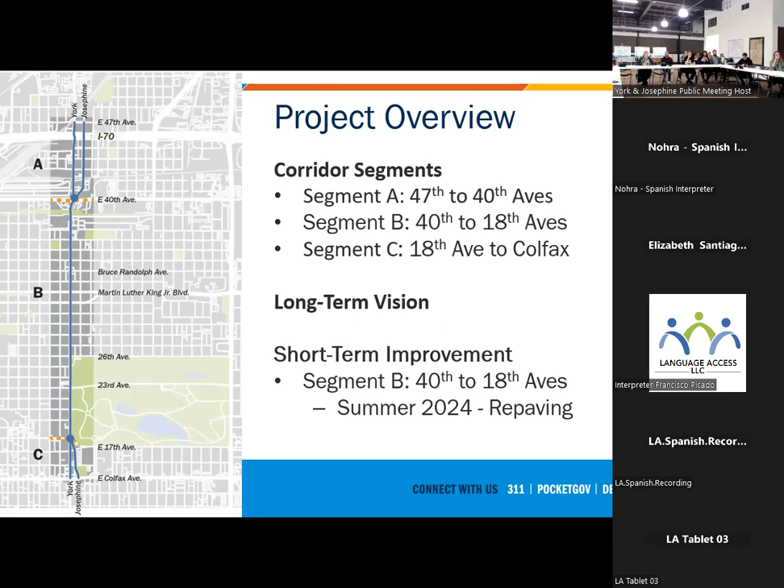So just a high-level schedule, where we're at, where we're going. For those that weren't part of our last public meeting, that occurred back in July. We did do a lot of community touch points between then and now as well - went to a bunch of farmers markets, met you all kind of on the street, a lot of different flyering events as well, where we got to speak with a decent amount of you. So thank you all who were there the first time around and who came because of the new flyering that we just did recently.

Since that last meeting, we did our alternative analysis internally, and I'll talk through what that really means and how we got to those alternatives. Going forward, we will have a third public meeting later on, probably end of Q1, Q2 2024, to follow up on the final design here.

So I've said alternative analysis a lot. What that really means is taking a bunch of different information for a corridor and identifying what the best alternatives are. We're analyzing the alternatives we can do on this corridor from what's currently existing on the roadway today. What goes into that is previous planning efforts, existing conditions, the city's goals and objectives, as well as your input from the last few community touch points and public meetings. What we do from there is develop alternatives, 3 specifically that Eileen's going to go through in a couple minutes. We'll use this meeting to help identify which one we should move forward with as the long-term solution to making York and Josephine corridor safer.

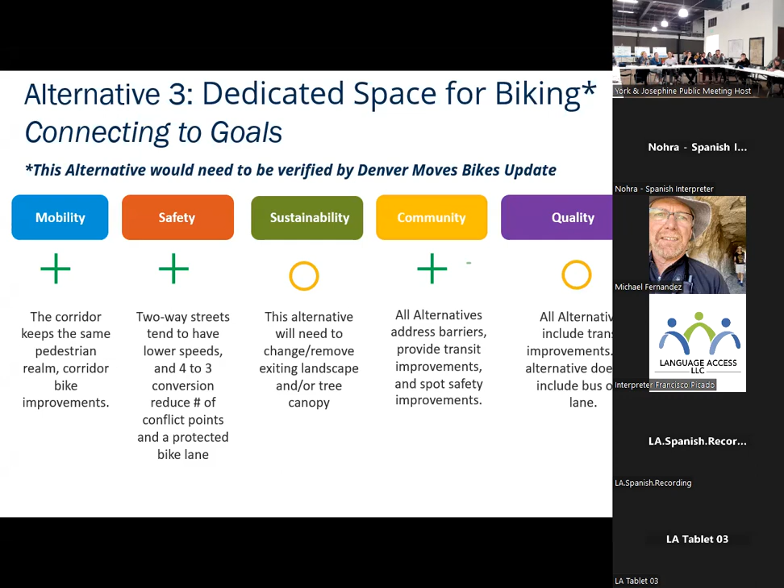So the segment details. Considering how big this corridor is, we're going to look at the north section of both York and Josephine and go through each alternative so we can have a collective understanding of what could happen there.

Oh, yeah, yeah. Pause for questions.

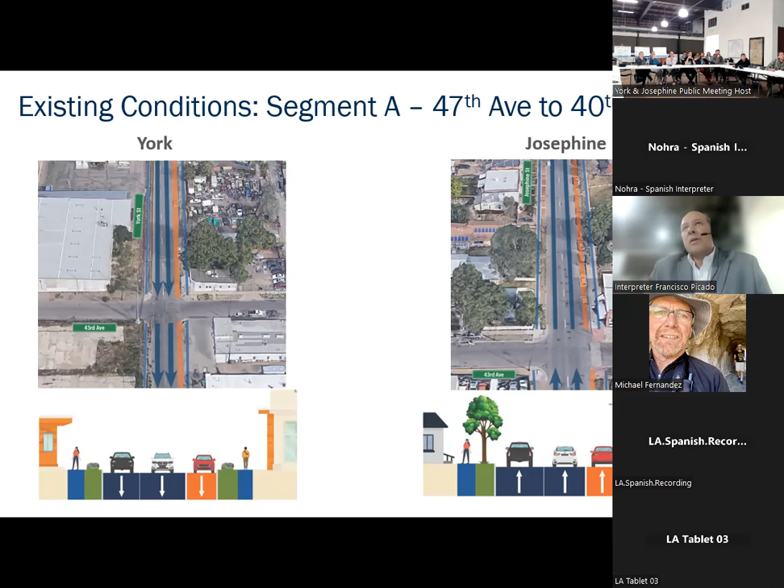All right, so we're going to head into segment A. This is just a snapshot to ground us and remind us what part of this corridor we're talking about. This is segment A, York and Josephine. Currently, they each are one-way in each direction—York is southbound, Josephine is northbound. And we can kind of start hopping in.

So alternative one is considering reconfiguring the corridor. Related to what Mike mentioned about how we develop these alternatives, a previous recommendation from another planning study said, let's convert these to two-way streets, as well as lots of public input related to this saying, let's convert them, let's stop the one-way.

The idea then is that York would use one lane in each direction with a center turn lane. Josephine would be one lane in each direction with safety and/or parking on street. Right now, again, they have parking on street on the east side—this would offer parking on both sides, really looking to downgrade it if it makes sense, since right now it's carrying a bunch of freight, a bunch of trucks.

We want them actually to stay on York. That's the idea with this - all of the freight movements and commercial vehicles associated with the industrial area will stay on York. The next slide will cover this.

Josephine can turn into that neighborhood place, very similar to the collector, the neighborhood collector. Columbine is just the next street on the east side of it. So really trying to change the character of that and make it more into a neighborhood street. If you go to the next slide.

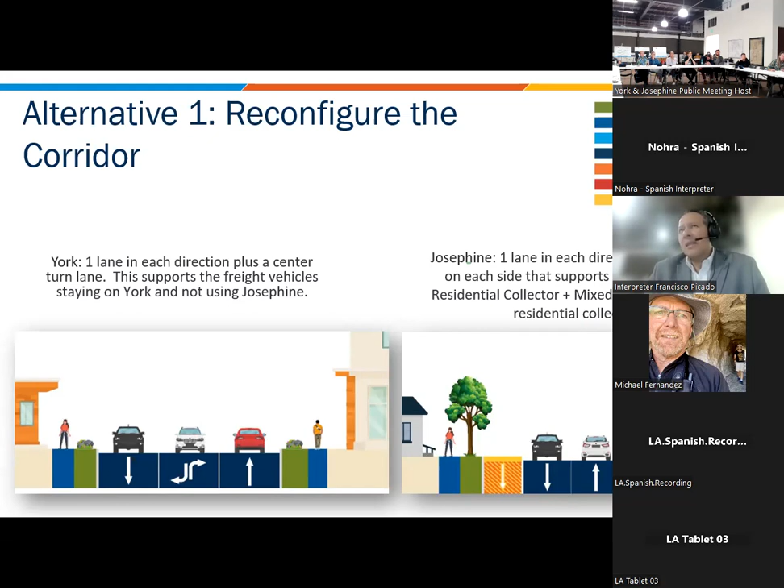This came up - we met with our stakeholders on the corridor as well, and they asked how would this happen, how would the turning movements and vehicles move, how would this work? So this is an idea of how the transition can happen.

So again, we're really looking to have vehicle movements from that through traffic, whether coming from south or north - we'll say from 40th - stay on York. If they need to go to Josephine, that's the whole point of this. They're going to make a hard right turn and a hard left to head north or south. That's the way the neighborhood works.

So the idea again is all of the freight movements and main traffic looking to get to or from I-70, or to continue going north, there's no reason to go onto Josephine. They're just going to stay on York Street. That's really going to continue to be that arterial collector, providing more of that prioritized space for those movements.

There's a couple green arrows we have here, acknowledging that we need to keep people walking and biking connected. So let's use the previous street or create new spaces, and reprioritize what Denver owns to make that a priority for people walking and biking so that connectivity continues.

Next slide - Alternative 2 is prioritizing transit. This would keep the one-way streets, and we would align with the transit pickup and drop-offs related to the doors on the bus. So we need to keep them on one side of the street for each direction.

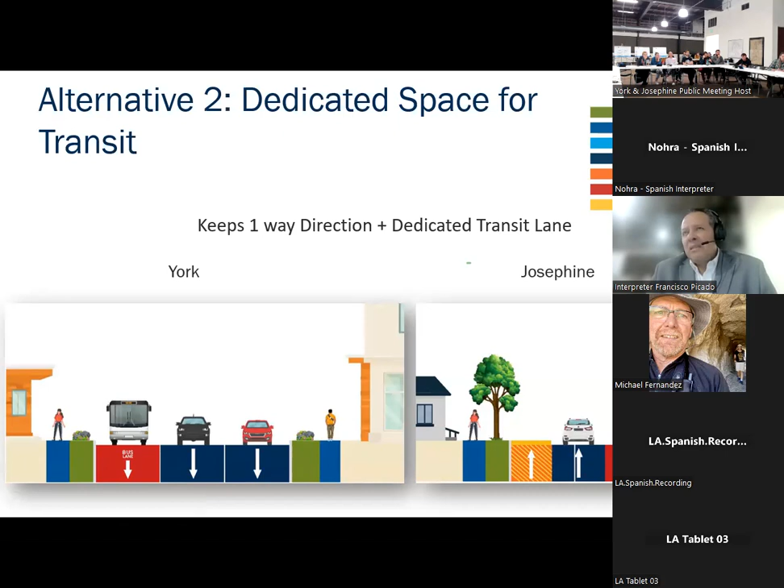You can go to the next slide - and for dedicated space for biking, for people biking.

For this alternative, we would reconfigure the corridor, making this into two-way streets. Then we would prioritize and move people that are biking to a neighborhood bikeway on the neighborhood street, Josephine. That would be the goal - where people would bike is on Josephine. Alright, next slide.

So this is the time - the next 10, 15 minutes are going to go through each area of the corridor study, go through the alternatives, and then take time together, both online and in person, to clarify and ask questions about these alternatives.

Yeah, just want to double down on what Eileen said there - this time open for questions is really to get clarification on each alternative. And then when you have a preference, that would go into the survey or on the hard document here in person.

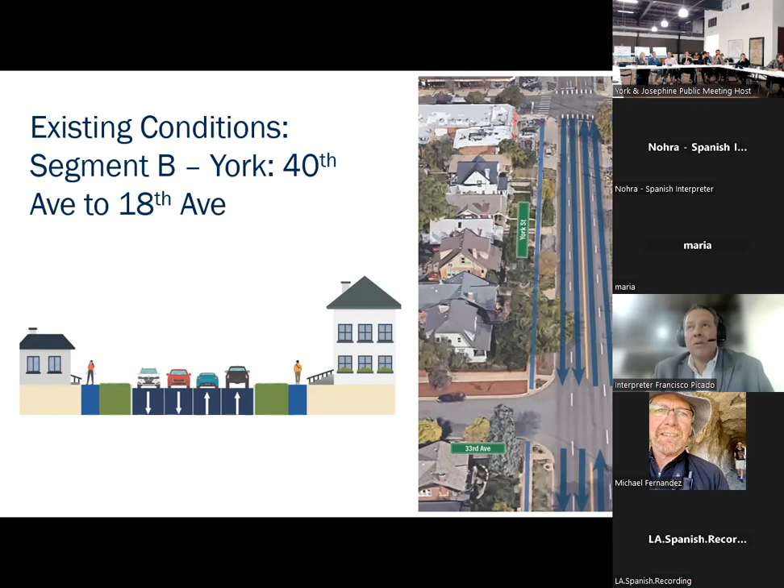Alternative 1, and these are stacked together. This is reconfiguring the roadway, removing a lane in the long term. So we would have 1 travel lane in each direction and then a center turn lane. In the long-term vision, we could also move in and extend the pedestrian realm, possibly widening the sidewalk or moving the curb further into the street to create more area for landscaping and tree planting.

Alternative 2 is dedicated space for transit. This would reconfigure the roadway to 1 lane in each direction with a center turn lane. We would widen out into the existing area where there is landscaping, grass, and trees, to provide dedicated space for transit.

The third option is dedicated space for people biking. We've looked at the street, measuring up and down, hoping that some miraculous way the curbs would move. They will not—we are limited on space. We can't fit in 3 travel lanes and bike lanes. So if we want dedicated space for people biking, we would, like alternative 2, cut into the existing grass, pedestrian zone, and trees. It would affect that if we provided space for people biking.

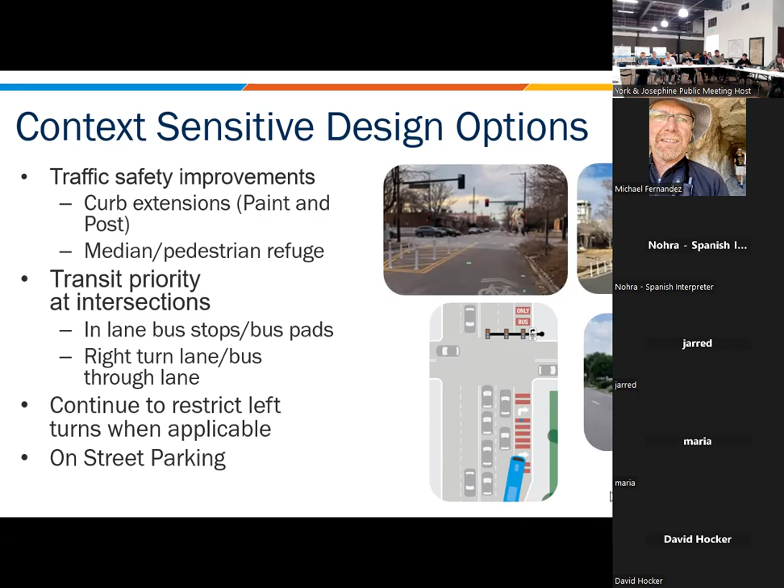No, we're good. We are going to move forward to talk through the alternatives of the last segment, the one that's further south between 18th and Colfax. These will look familiar. The current existing conditions are very similar to the north: two one-way streets, York heading south, Josephine heading north.

Before we move forward into showing the alternatives, we want to note that we recognize Colfax Avenue will have a brand new upgraded bus rapid transit project installed sometime in the next years. I won't say year or years and put a date on it. We'll leave that project over there in a positive way. It's moving, that's great. We recognize that there will be impacts in a positive way to the way people move through, to, and across the corridor.

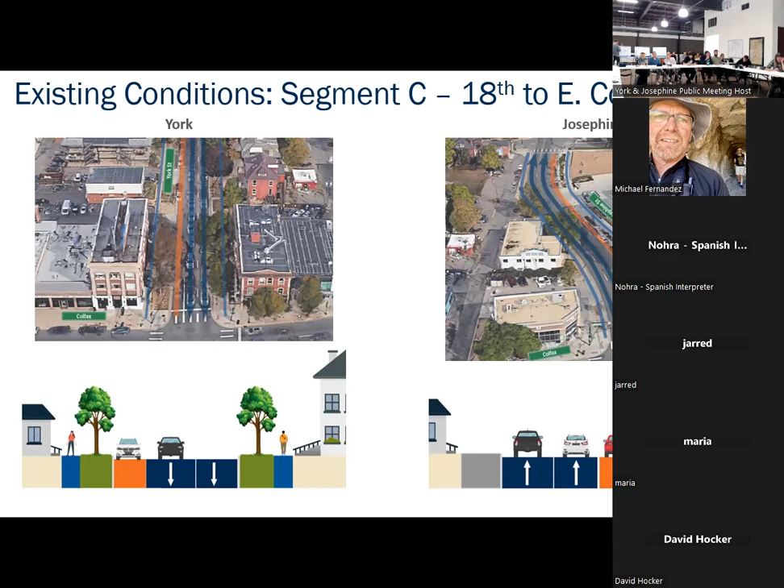With these alternatives, if one moves forward, Denver will have to do additional study because we are again recommending looking for two-way, reconfiguring the roadways, improving transit, and providing dedicated space for bicyclists like in the other segments. So this would need further study, most likely after the Colfax Avenue Bus Rapid Transit Project is open, just to understand how that movement and people's behaviors have changed.

Moving forward, alternative one, very similar to the north segment, is that we would reconfigure the streets so they would be two-way in each direction. Also recognizing for York in this alternative, parking is not a guarantee, it could be one lane in each direction with a center turn lane. So I don't want people to think that the safety improvements and parking are a yes, it could be that center turn lane instead. As well, there's room for Josephine to have one lane in each direction, a center turn lane, and possible safety improvements or on-street parking that currently exists.

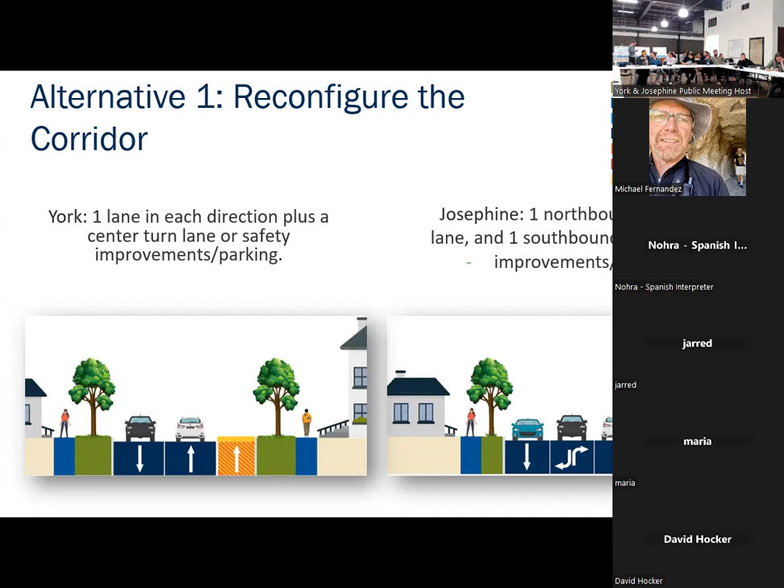Alternative two is looking at prioritizing transit. This keeps the one-way street, very similar to what we saw in the northern section.

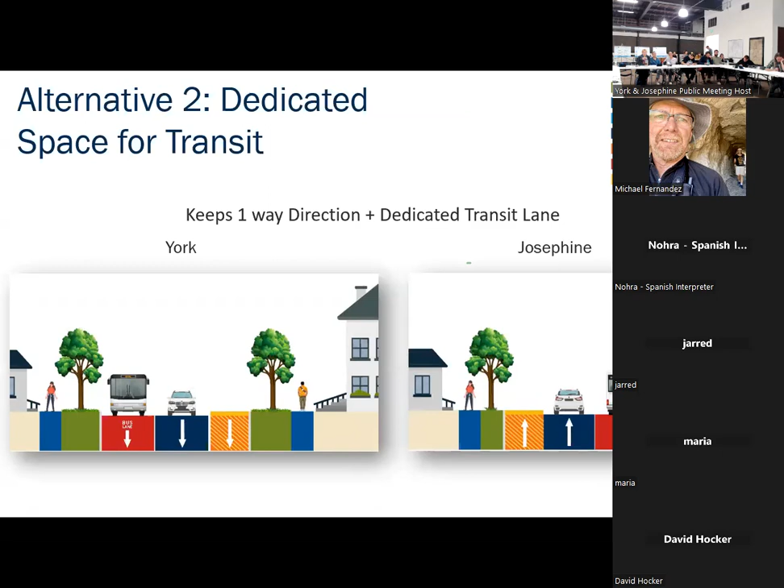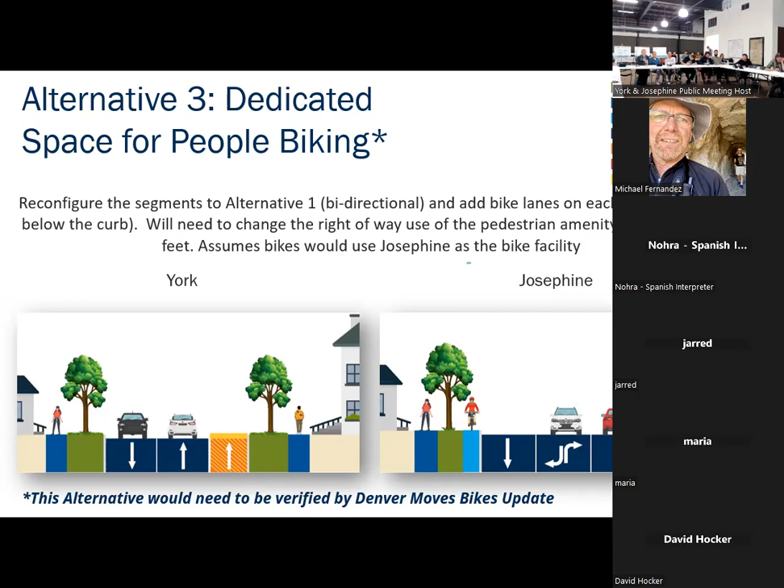Alternative three provides dedicated space for people biking. Similar to the north segment, this would use Josephine as prioritizing people for biking. It would not split the street, again looking for that kind of safe connection. So we have that dedicated space just on Josephine for people biking. The next slide shows all three alternatives, and we want to take questions or discussion about these.

I need to be a quick wet blanket on this one before we go further, because I forgot to mention this. This is one of those situations where a study would have to lead to a study. I hate to say that, it's the absolute worst thing for people to say. Oh, you did say that. Okay, sorry, I clearly wasn't listening. I will reiterate: the study will lead to a study, not just because of Colfax BRT, but because this would potentially be the opportunity to look at this from 18th down to First.

There's a full stretch. Even if Colfax BRT went in tomorrow, we can't have Josephine be two-way, go into the one-way at crossing one of the major arterials in our city. There are a lot more things that have to happen there.

What this will do is gear whenever that next study becomes a priority, what we start focusing on first. So that's what I want to clarify here. Think of this as whatever happens here would then get extended further south if we started that next study. Now we'll open up for questions.

So which one of these options, I'm thinking specifically for East High School, whenever you're going south, when you get to that turn, the left turn lane, it is always backed up because there's not enough space between York and Josephine to have enough cars to get the flow through. So you would have high school traffic backed up all the way up York, almost all the way to 17th sometimes. Maybe through 17th.

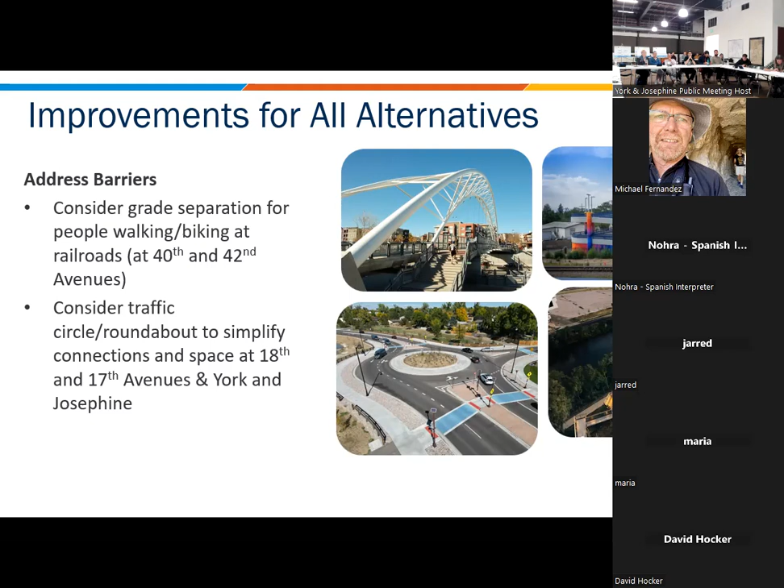When it comes to the extra land around York, Josephine, 18th, 17th, there's actually two triangular parcels missing sidewalks. Let's look and consider a roundabout. Can we do some type of consolidation? We have a lot of roadways, we have signals, and drivers, the lanes kind of go here and there. If you're not in the right one, you're going to miss a turn. Again, accidents, speeding. Let's evaluate and see if we can do some type of traffic circle or roundabout.

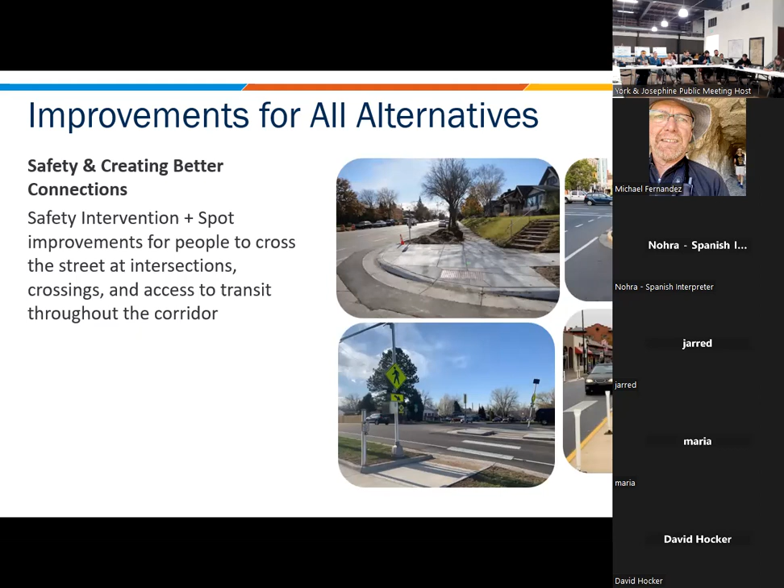What Mike has mentioned throughout the corridor, a lot of the things we were looking at were two-dimensional cross sections. When we say safety improvements and creating better connections, this is exactly what a lot of the questions and comments have come about. Every intersection, let's relook at the mid-blocks, see if we can make them safer. Let's put in pedestrian medians, refuge islands - it supports safety for all users. And then also those bump outs, and we can start looking at landscaping, integrating green infrastructure.

Becoming more environmentally resilient - this has to happen along the entire corridor. One of the goals mentioned early on is recognizing the existing conditions are not equitable. So in the north section, you have very stark conditions compared to the middle section. Let's ensure everything is equitable throughout the entire corridor and see if we can move forward in integrating some green infrastructure.

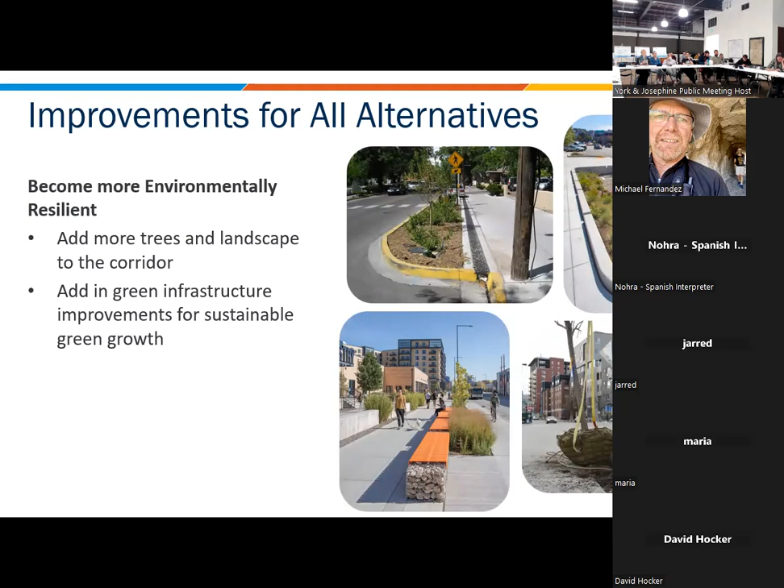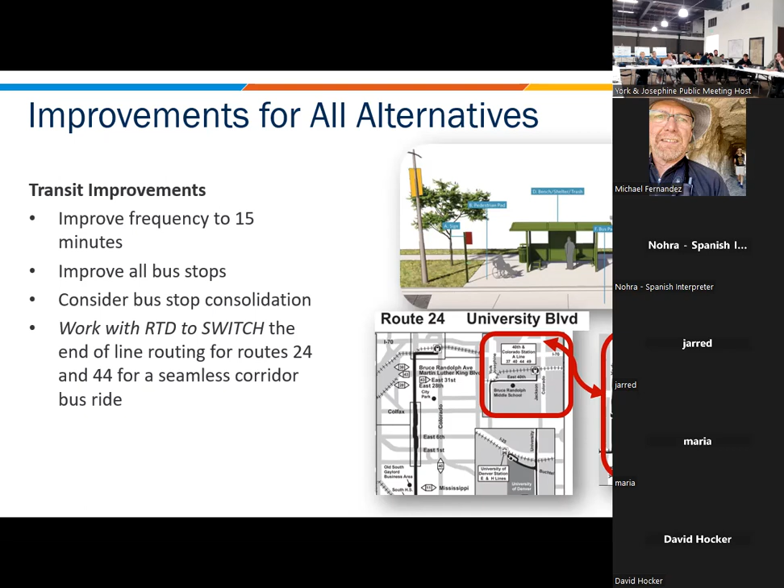When it comes to the corridor vision and how we're connecting our neighborhoods, let's consider right now: Route 24 gets to 40th and makes a right, it does not go north. Another bus route, Route 44, comes down 40th and goes up. Let's see if we can flip the end of those lines, making sure people from the north segment and the south segment can access this corridor continuously. These are options, and then the long-term 15-minute frequency. These maps just highlight where these improvements are going, and they'll be put online so you can see more detail.

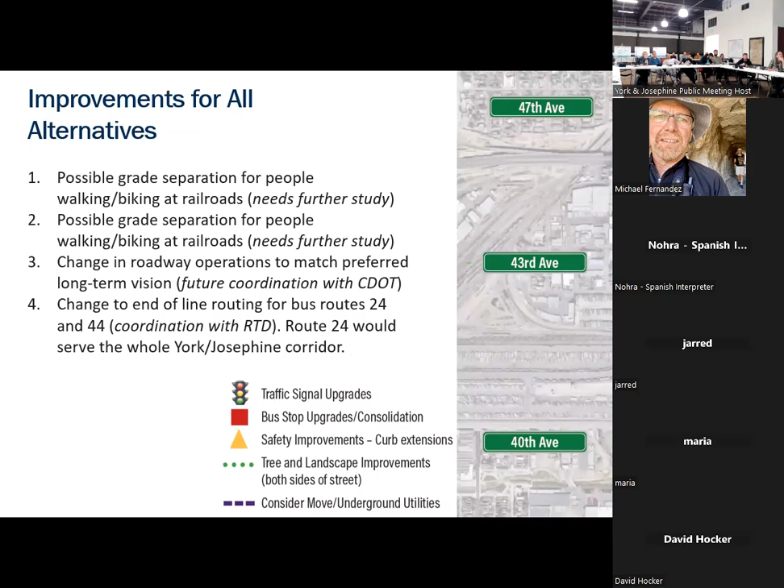One thing, if you go to the next slide, you'll start seeing the traffic signal upgrades. This is recognizing Mike has used the term span wire. These are old, we need to upgrade these. We're hoping we can upgrade them almost as an interim improvement so we can start receiving those benefits of making sure safety is prioritized for all users.

Next slide. You'll again see bus stop upgrades and continued safety improvements along the corridor. These improvements can happen for all alternatives. I know this is a lot of information, hopefully it's understandable. There's changes to the roadway itself in how it works and operates, but also complementary and very needed improvements that can happen for all of the alternatives.

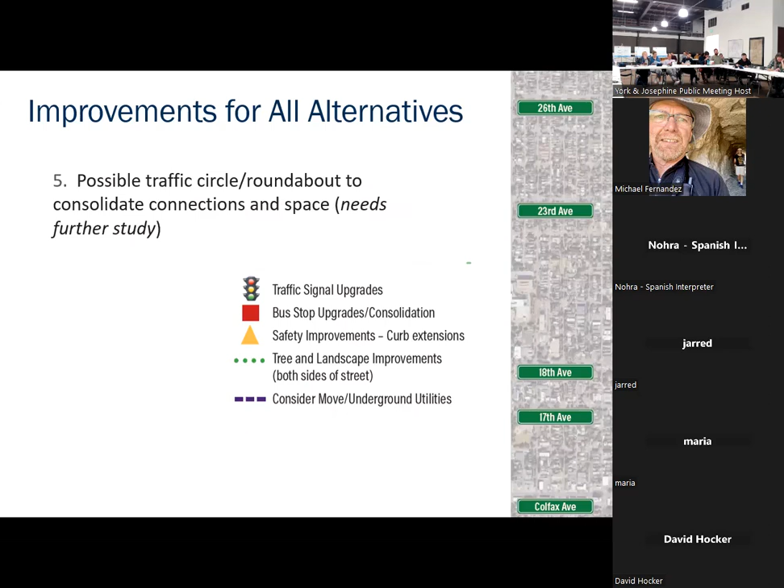Just real quick before we wrap up, I want to point out we do have some other projects going on in this area as well. We mentioned a decent amount the Denver Moves Bikes update.